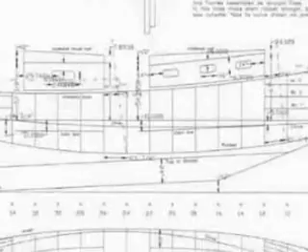We wanted spacious accommodations for two, with a comfortable layout, but not too large to handle sails and get her hauled through the mountains. After much searching and deciding, a Bruce Roberts 43 Mark II was to be our boat.

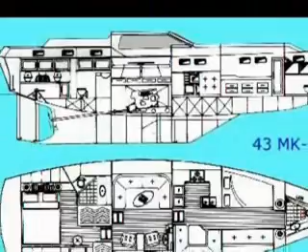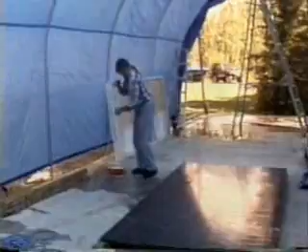The first day of the boat building adventure. Before the concrete was poured, we made rows of pipe inset into it for the frames of the tent. The frames were made from regular chain link fence pipe.

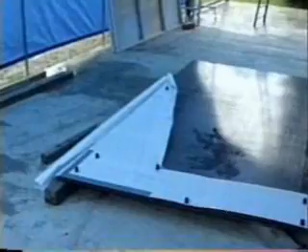First, the lines on the blueprints need to be transferred to the plate. To maximize efficiency and minimize the loss of plate, the frame halves need to be positioned to cover as much of the plate as possible. We made paper frames from the study plans and flipped them around a scale sheet that represented the plate. It was like doing a giant blank jigsaw puzzle, but eventually we got it.

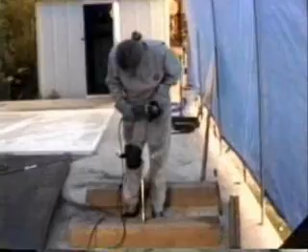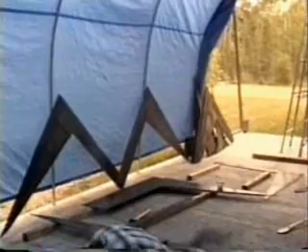Well, all of the frames punched on the rainy day need to be fixed. Some were almost a 1/4 inch out, and a few others needed a little added on. So off we went, grinding them down. In fact, we did a lot of grinding. We even took pieces to work to grind if there might be a slow day.

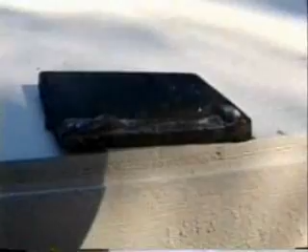We noticed that as the weld length increased, the plate pulled in excessively to the point that it overlapped. Another concern was penetration. Okay, here is the quality of the welds we're getting, or how far they're going in. It's not a bad penetration, not quite 1/8 of an inch though. We tried all different kinds of things. We decided to bevel everything, I think.

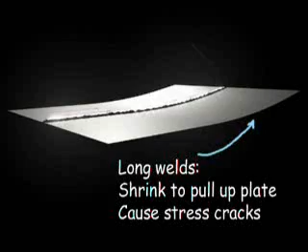Beveling the thick plate would allow for better penetration, but still caused problems with cooling. Long welds would cause the plate to curl up too. After some more reading, Gina found out that staggering the welds on both sides would stop the curling problem.

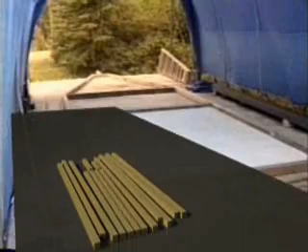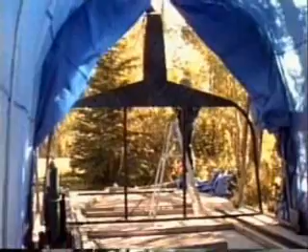The strong back will support the boat and ensure an even surface to build on. Its construction was easy, but getting it level was difficult. Once we finished the first frame, the rest followed easily and quickly. With the frame standing, the sheer size of the boat became evident. It was exciting to see the shape appear before our eyes.

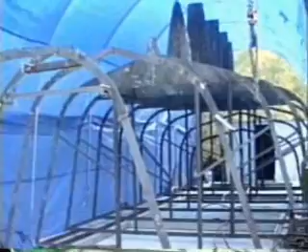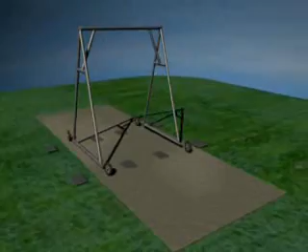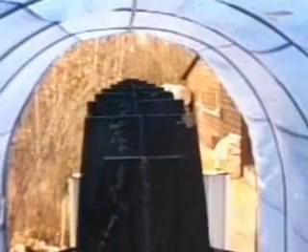Finally, after a long delay, the radius plate has arrived. The first two pieces to be served up are near the bow. The 10-foot pieces were cut to match the amount of radius frame on the boat.

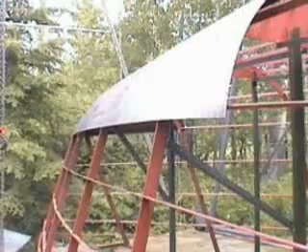The actual radius is 30 inches, so that's 60 times 3.14. We'll be using a 1/4. Carry the 2. 188.4. 47.1. But the curve is less than 1/4 of a circle, so that calculation doesn't matter anyway.

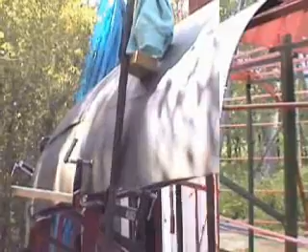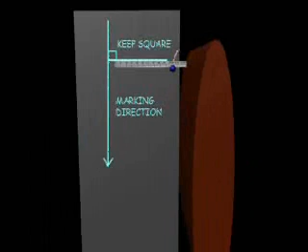You see, anything that is curved becomes very rigid and just doesn't like to bend any other way. To the edge to be cut around, a line is marked. It's important that the ruler stays at a right angle all along. This way, a perfect copy will be lofted.

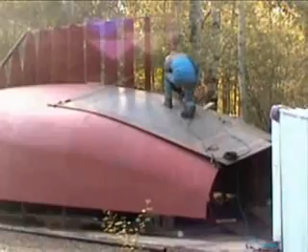A note on nylon jackets. They may melt in weld spatter, but only boat builders weld and grind in nice leather jackets.

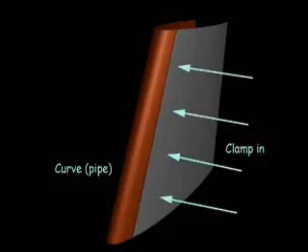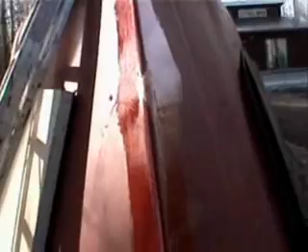We ended up using every large clamp there was to pull this stubborn heavy plate in. The other side was tricky because the clamps kept slipping off the finished side, so Gina welded little cups for the clamps to sit in. It's really neat to walk through the hull now it's all closed in. But winter came and ended our weekend project until spring.

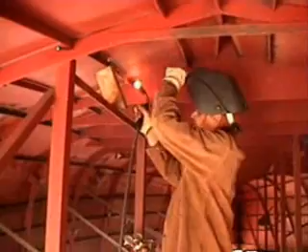Balancing chain on the end resulted in the jack getting fired across the yard whenever the chain slipped off of it. The more Gina welded, the more I ground, and the more I ground, the more she welded, it seemed. Thankfully, she helped me with the last bunch as my arms were getting pretty tired.

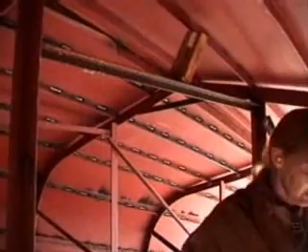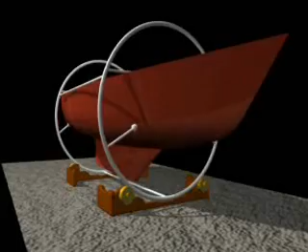But we have seen pictures of massive cradles on rollers used to turn the boat over. This may be a good solution for mass production, but for a one-off build like ours, it just seems to be a waste of materials and time to do it that way. Gina isn't nervous about anything usually, but I caught her with a worried look.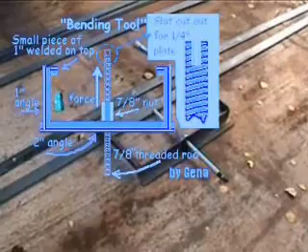Anyways, the system is to start at the center, then do 6.5 cranks at each mark on each side. Using the level offset a bit, a smooth curved slope can be seen. We followed the blueprints for the camber, but a camber can be figured out easily.

Gena looks pooped. No wonder, she's been working on the... Okay, I won't say it.

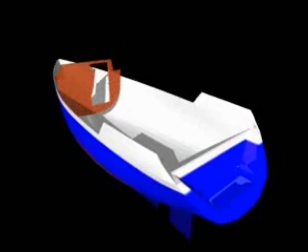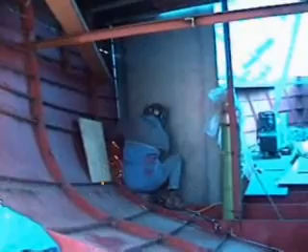Putting the aft bulkheads. As you probably know, bulkheads divide off areas of the boat for privacy, extra space, and in our case, safety. Directly on the plate, and join the dots to get the shape. The only thing that was nasty was getting the stringer slots properly lined up.

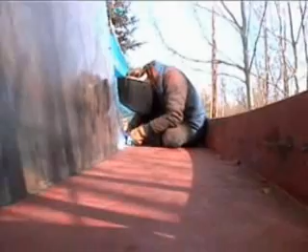Each wooden stick denoted a stringer, then twist into 10 degrees at the extreme forward end of the cabin top, being careful not to distort those angles while welding by tapping the plate one way or the other and tapping in the wedges along the deck edge.

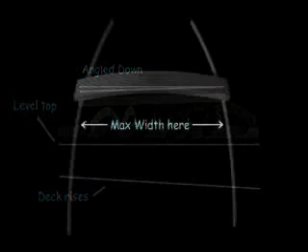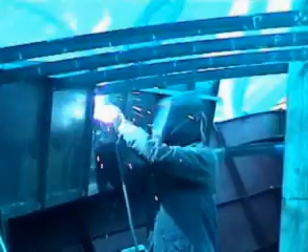Because of this, the pilot house roof has an odd problem with height. The maximum width is in the middle, so to get the top straight, the sides would need to curve up. After bending some frames for the cabin top, I was careful this time. Gena quickly tacked them in place, and this time they all lined up perfectly.

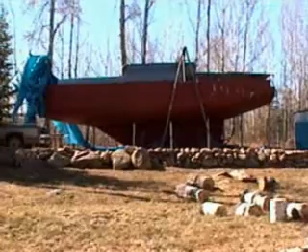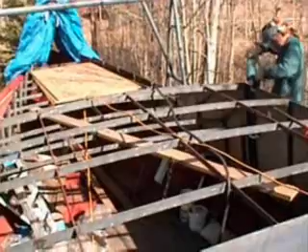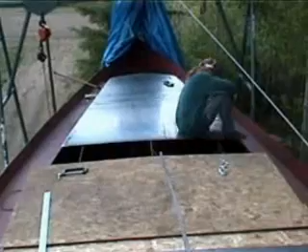But from below, it resembles a U-boat still. That'll be remedied shortly. But we think by inserting a split pipe, the resulting round edge is nicer and safer. Now to get the rest of the roof on. Welding had to be done with care because the plate joins in between frames. We thought and allowed a slight downward slope for water drainage.

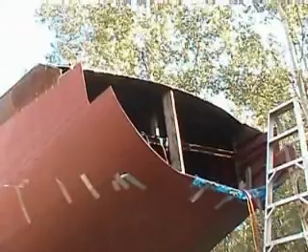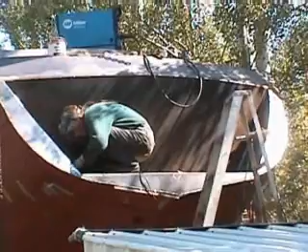It should be the same as the aft of the coaming. But somehow we must think of a way to get a template of the transom from inside the hull. The cut flowed down very nicely. Next, the deck of the swim platform must be cut. Took several tries as it really did not want to go. I suppose if the drain pipes were plugged, we could use it for a bathtub or, hey, maybe a hot tub?